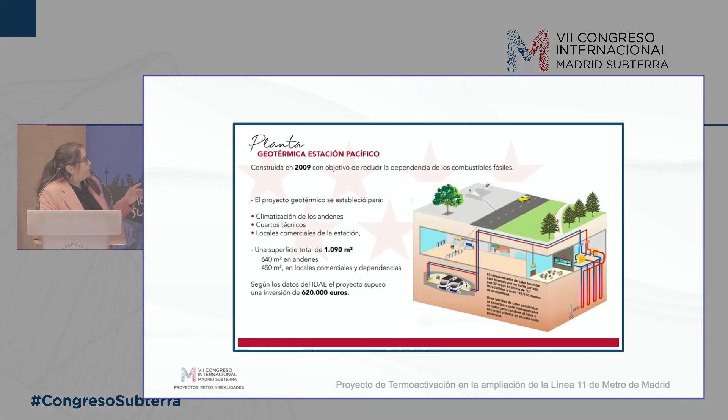Metro Madrid in 2009 launched a project aimed at the thermal activation, building collection wells in the Pacific Metro station, which is in line 1 of the subway of Madrid. This was a project aimed at heating the platforms and some of the businesses in the subway station.

This thermal activation system had the challenge of using capturing wells that on a constant basis received heat from the geothermal system of the station. In other words, we're talking about a low enthalpy installation, where we had those wells that were used to exchange temperature that was then taken to a geothermal pump.

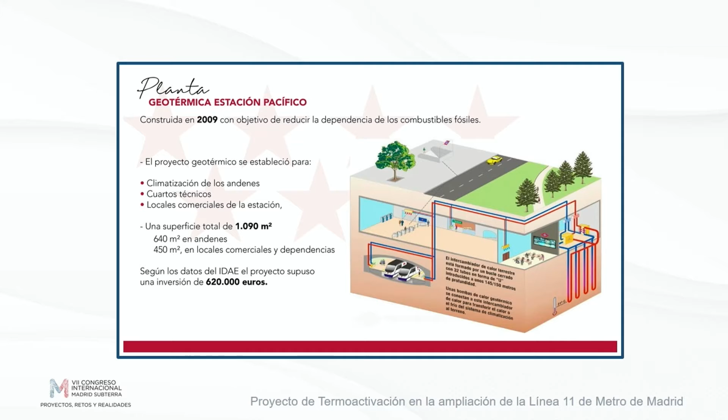The problem with this pump is that the demand of the station was not balanced. The demand of the subway only demanded cooling. So the entire terrain around was just heating up constantly, and as a result, the lifespan of those wells was not as high as we expected. That meant the surrounding area heated up, so there was heat storage that now we're trying to extract, to withdraw to the outside.

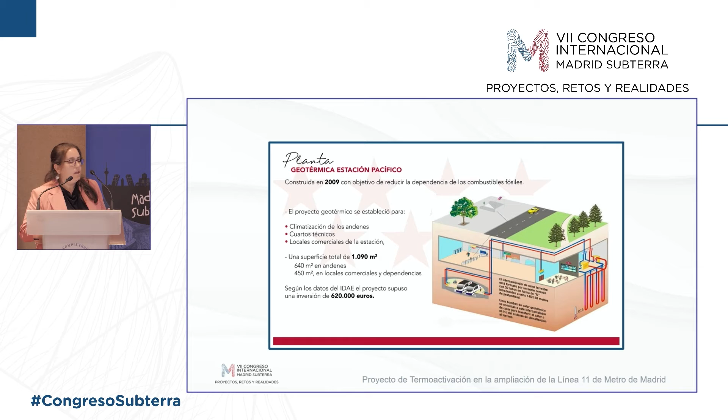In line with the previous presentation, what we're trying to do is to make sure district heating can be evolved so that we can collect all the heating stored in some of these wells in Madrid, in the Metro of Madrid. I'm going to talk about some of the actions we expect to undertake within the responsibility of my agency. These are very important actions and initiatives that speak volumes about the potential of geothermal generation as a source for cooling and heating in the subway.

For example, we have line 5, which will be expanded from Alameda de Osuna until the airport. We have line 11. All these actions within line 11 are related to a bigger infrastructure that is going to be developed in Madrid that will connect the north and the south, and allow us to connect the entire community.

So we're talking Cuatro Vientos, La Fortuna, Plaza Elíptica, Conde de Casal. This is the action I'm going to be focusing on during this presentation, because it's what we expect to implement a geothermal system.

Then the section from Conde de Casal to Mar de Cristal, which is going to be divided into two different sections because it's quite large, quite long. Then we have Mar de Cristal, Valdebebas. All this investment, all these initiatives, are of a public nature, with the exception of Chamartín Fuencarral Norte, which will be funded by a public-private partnership. In the latter, we also expect to include the installation of geothermal systems in addition to other power generation sources, renewable, obviously.

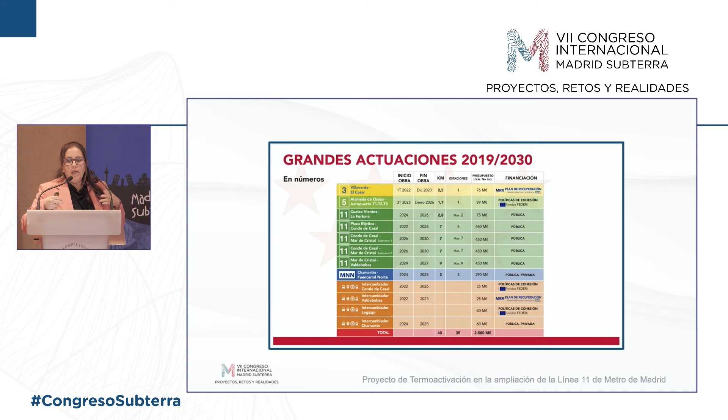In this case, the exchanger of Conde Casal is interconnected with the action of Plaza Elíptica Conde Casal, because in the same station on line 11, in the same place, at the surface, we will have that exchanger, which will be the one that will collect the energy that is generated in each of the areas of the metro.

We're going to thermoactivate the different structures that are collected in the subway stations of Madrid. So we collect the residual heat that is latent in the subway of Madrid, and we will return it as usable energy to the exchanger of Conde Casal.

That's the idea. We'll have additional initiatives, such as the exchanger of Valdebebas and the one in Legazpi, and another one in Chamartín. As you can see, these are very important projects. It's a significant investment within the region of Madrid, and therefore this will be a great opportunity to use renewable energies and to change the way things have been done so far.

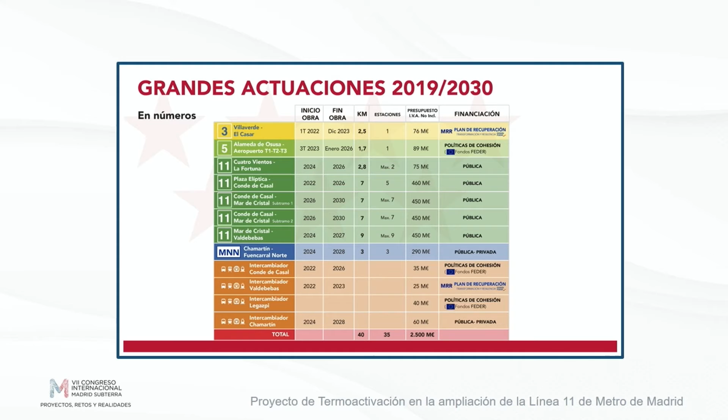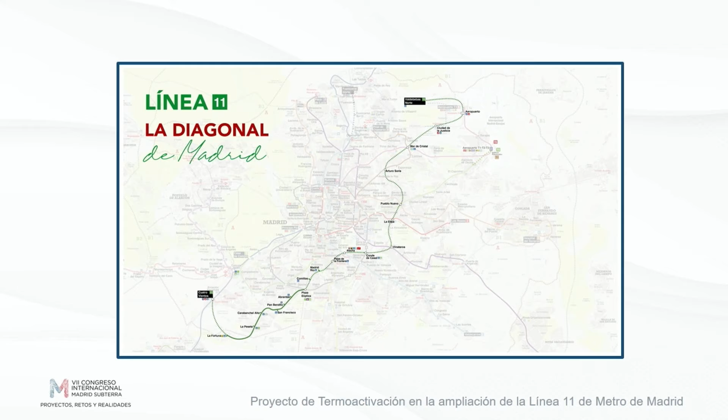This is what I said before, which is the connection between north and south, from Cuatro Vientos to Valdebebas. As I said before, these are the different sections of line 11, kind of like a graphic representation. Here you can see,

as part of the actions for the Diagonal in Madrid, all the hubs that will be created. So a hub in Plaza Elíptica, a transport hub in Cuatro Vientos, in Atocha, Mar de Cristal, Conde de Casal, Valdebebas, the airport, and Chamartín.

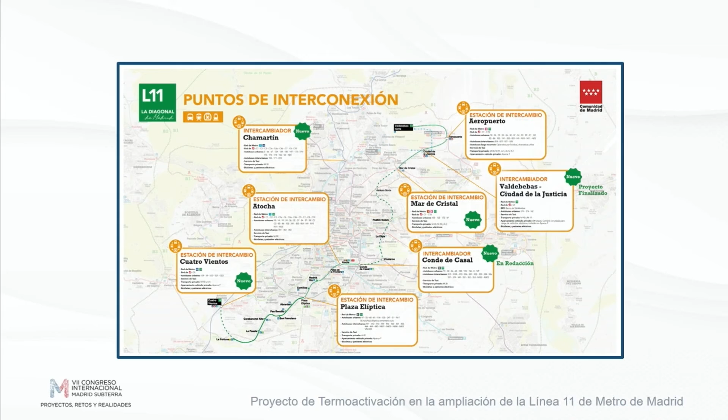It's important for you to see what's going to be executed on the surface and what it connects with, so that you can look at the potential people and companies requiring heat from this metro. So here we can see in yellow what we're going to do from Plaza Elíptica to Conde Casal, the bit that we're going to talk about in this speech.

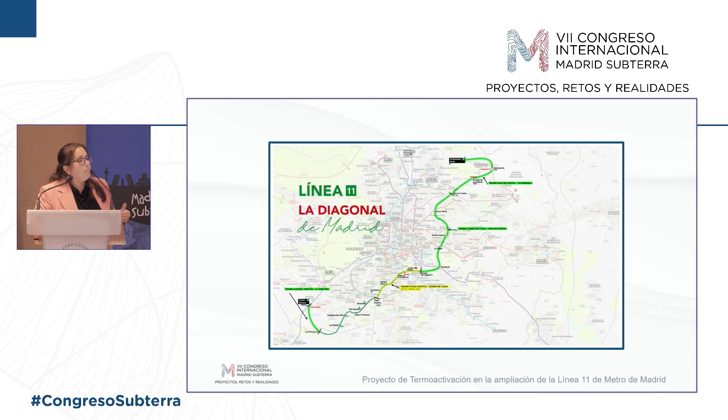And we're going to talk about what we're going to execute immediately. So all the other actions will take longer. This will be the most imminent one. And here you can see it more detailed.

In this slide, we present why we decided to execute this section. This section is being done because of the demand. There's a demand across this area, and it's something that was required.

So we are creating two new stations, Comillas and Madrid Rio, and we are interconnecting this line to other lines in Madrid Underground: Plaza Elíptica with line 6, Palos de la Frontera with line 3, Atocha with line 1, with the commuter trains and long distance trains, and Conde de Casal with line 6.

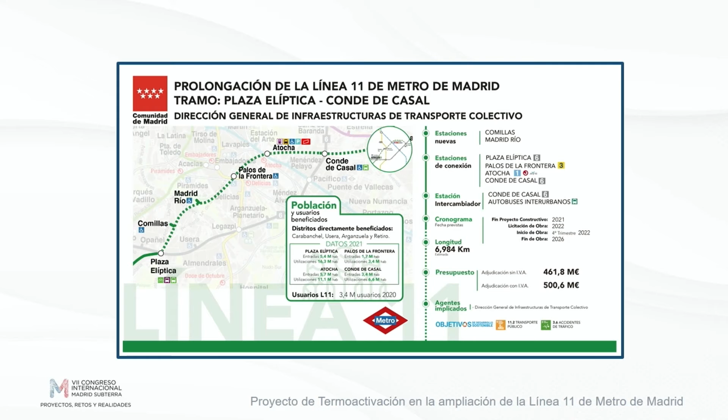Conde de Casal station, we're doing the underground but also the surface work for the transport hub in Conde de Casal. And well, here you can see the amounts that will be invested.

So let's talk about the Conde de Casal underground station. This is the station that we aim to use as a project for Metro de Madrid and for the Infrastructures Directorate. It's going to be a pioneer for the thermal activation of the structures.

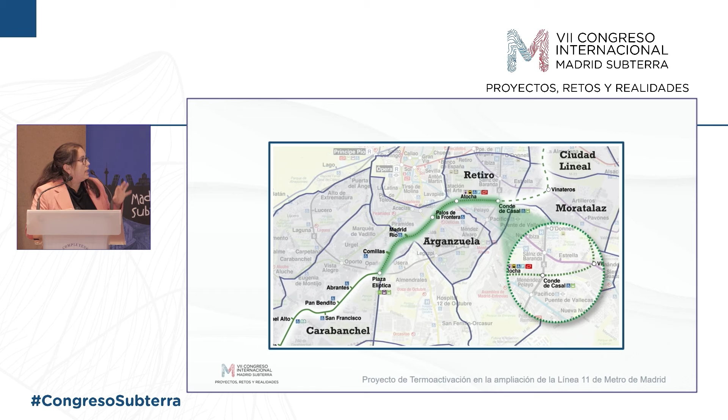We want to carry out in this station, as I said before, briefly, where we want to thermal activate the infrastructures, both at the station, but also in the tunnels, in order to exchange the surplus energy that we have.

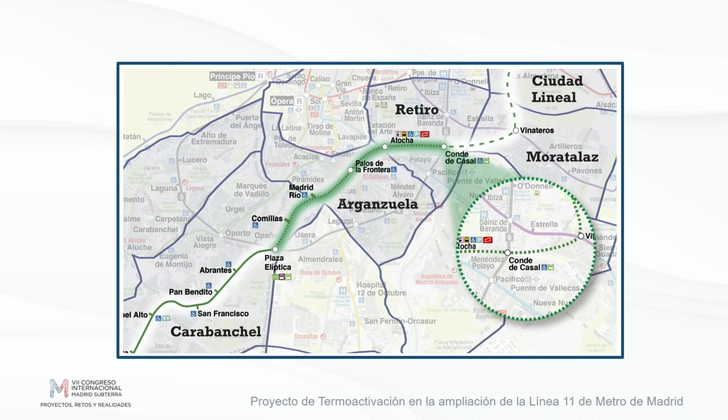Obviously, when the trains brake, they produce heat. All the facilities, in fact, produce heat, which is a problem for us and that we must eliminate. So we are thinking of thermal activating the structures so that we can give heating and cooling to the Conde de Casal transport hub.

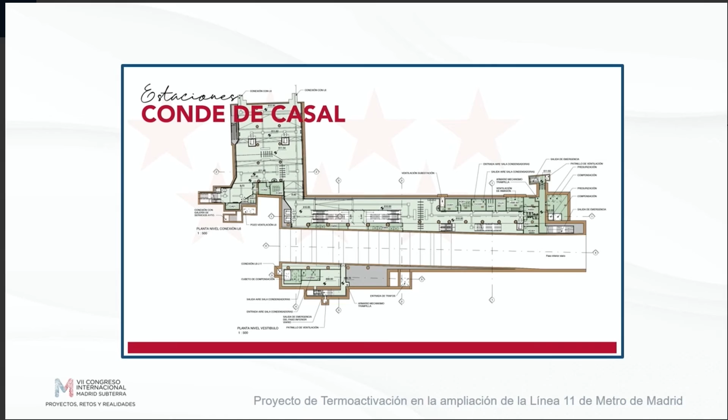Just so that you can get an idea, normally the stations, you can see how it is in the plan. Conde de Casal train station, we have the project already designed. And what we aim to thermal activate are the screens and the pillars within the station.

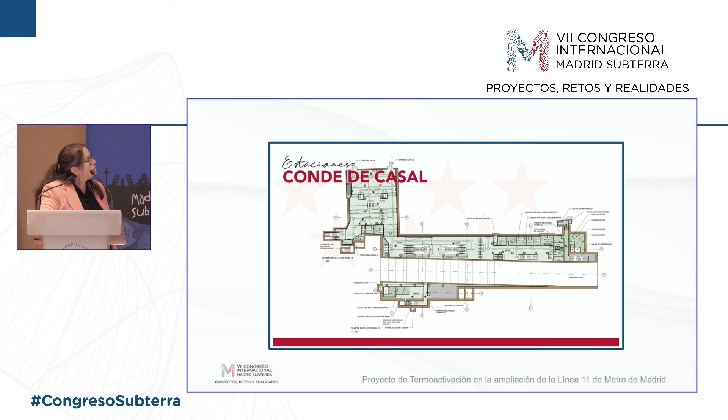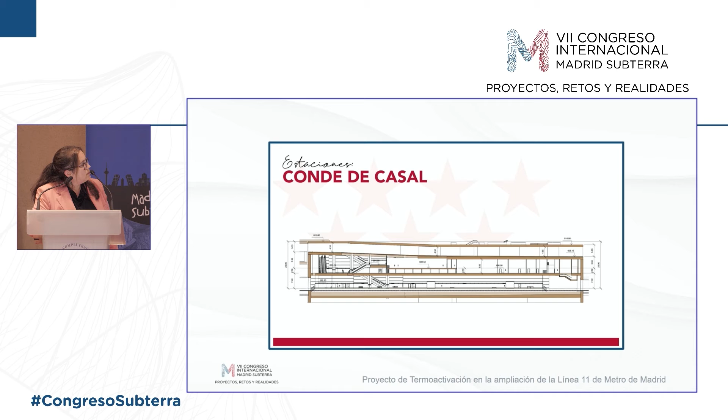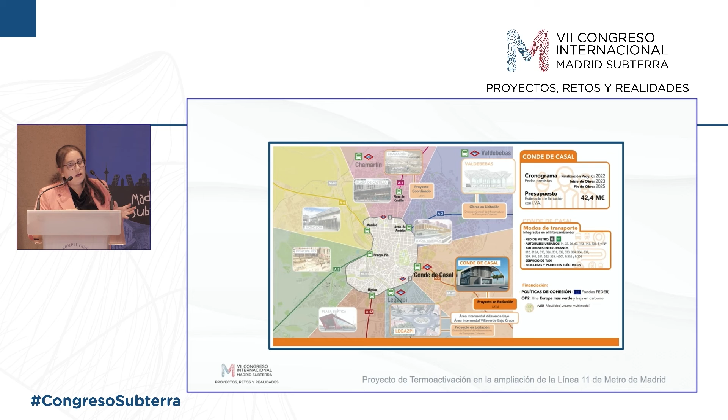So this is the station, as you can see it in a cross-sectional map. The thermal activation will be done on the screens and on the pillars, on the shafts. So just like we did with the section on line 11, we're going to do the same with the Conde de Casal transport hub. Here you can see the investments that we're going to make.

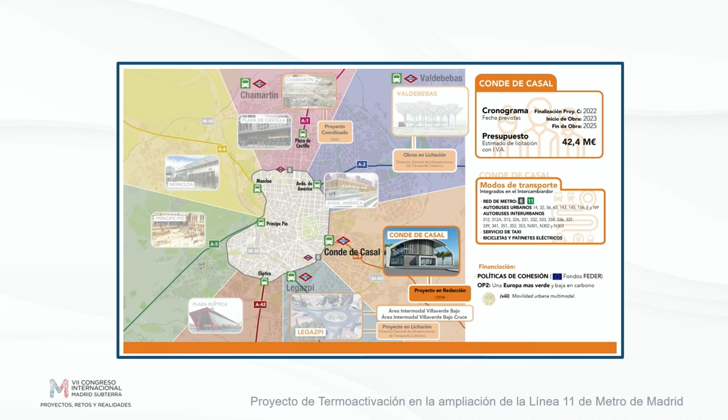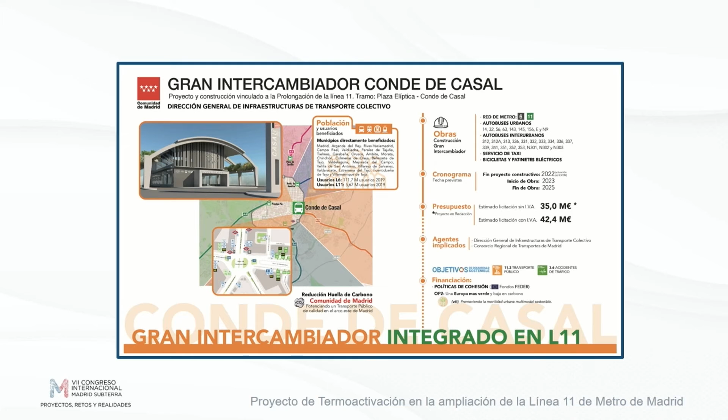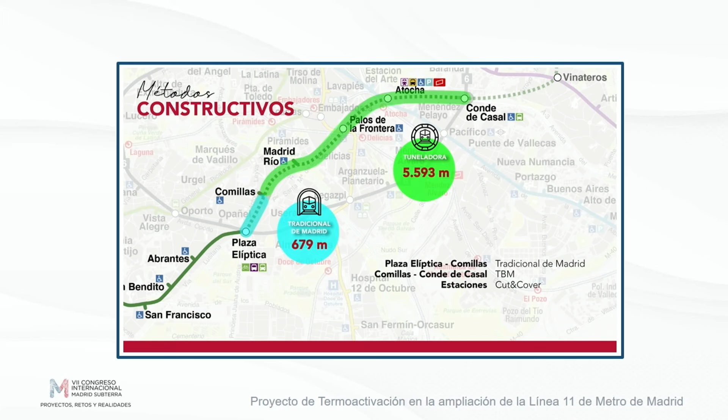It's also important to talk about how we built it. The line 11 section that's going to be executed will have two different construction methods: the traditional Madrid method for 679 meters, and with tunneling machines 5,593 meters. This gives you an idea of the size and dimensions of this project.

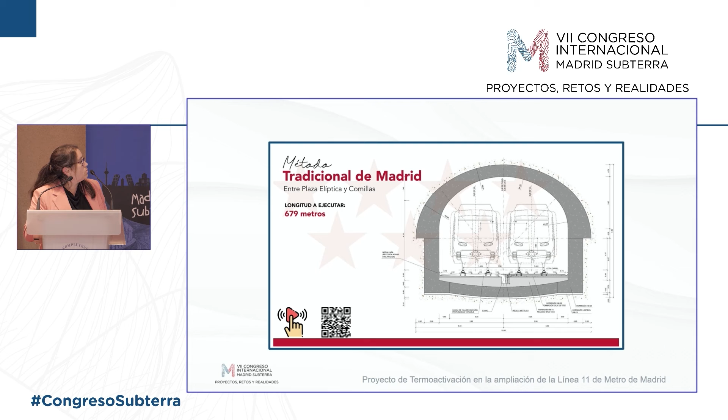Here I describe the traditional method for Madrid so that you can see how we execute it. You can use this QR code if you would like to watch a video, and that will send you to a YouTube video where you can see how we execute those 679 meters with the Madrid method. It's also important to say that this method that we are executing...

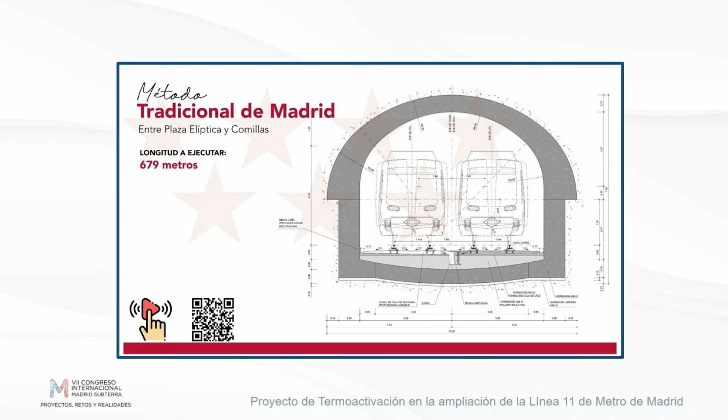it's important so that you can see the way in which we are going to put the pipes for the geothermal capturing. They'll be included on site, on the keystones, on the piping, but on the TBM, the tunneling method, which is a total of 5,593 meters, they will be prefabricated with their pipes. In subsequent slides, you will see how the tubes, the pipes, are inside the structure.

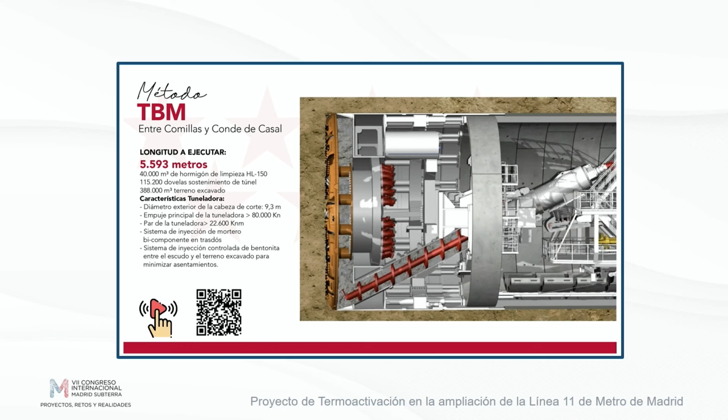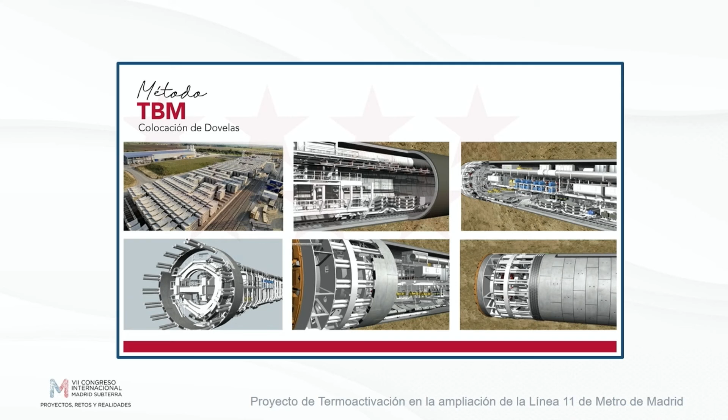You'll see that in just a minute. So this is the section for the tunnel, typical for the tunnels in Madrid. And this is so that you can see the segment factory needed in order to execute it properly.

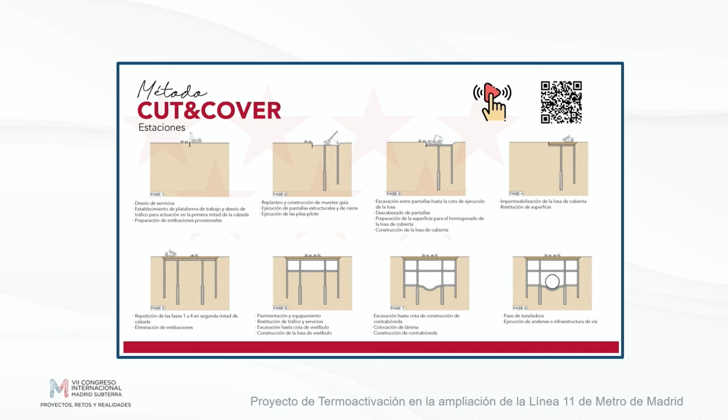As for the station, the construction will be different. It's cut and cover. What we actually normally do is the cover, the top screen of the station. Once we've done the top cover, then we start to carry out the inside of the station. So we'll thermo-activate the screens that are already in the station.

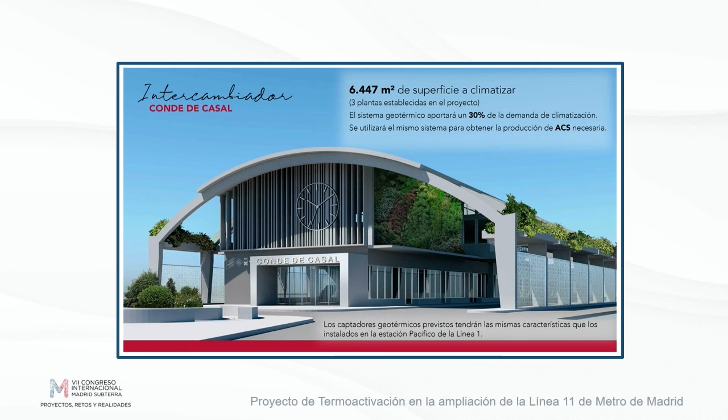The thermo-activation project, as I mentioned, is going to give cooling and heating to the transport hub. This geothermal system initially aimed to provide 30% of the heating and cooling services through the geothermal substations, and also it will provide hot water with the system.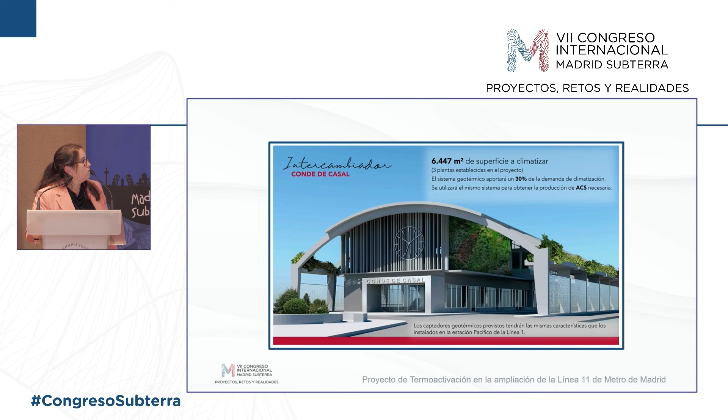The idea to execute this project is, as I said before, the thermal activation of the structures, but also we'll have capturing wells. We need these capture wells because we need to eliminate the heat that comes from the underground system, but we also need to somehow store in the summer all that surplus heat. So in the winter we'll use it, and in the summer we'll store it because there will not be a heating demand.

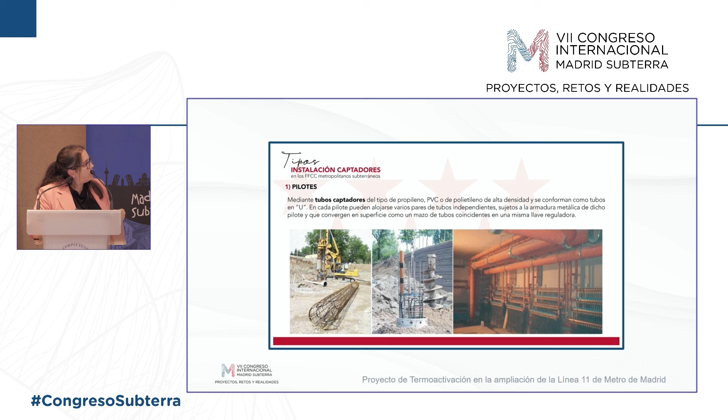And that's what I was mentioning before, just so you can see how we do the introduction of the pipes, how we will implement the pipes that will capture the geothermal energy and how we put it into the structure. So here we have a pile where we put a pillar where we put the pipe in, and once we bury it, we'll fill it up then with concrete. And this is where all the pipes will be.

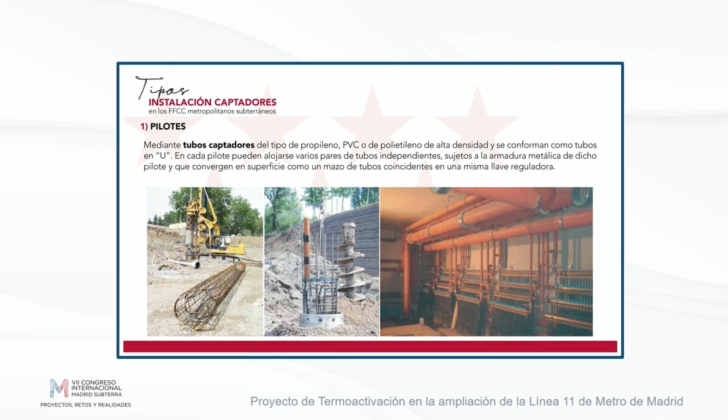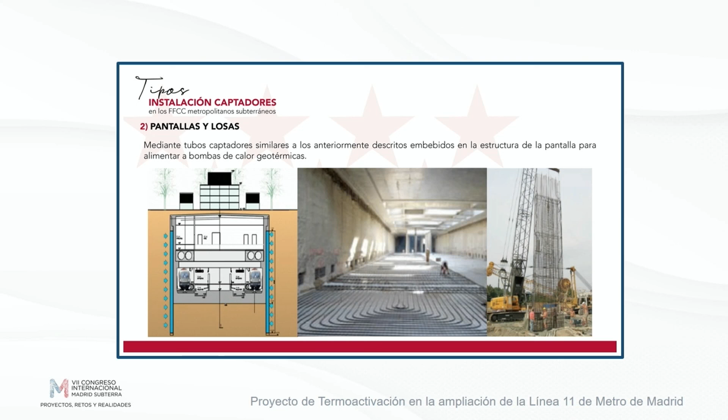This is the piping ring, we could say, where we can see the different pipes that come from the different thermal activated structures. On the screen, well, here we have the different screens. It's very similar to underfloor heating. We thermal activate the whole area, then we cover it with concrete, and that's the way to recover that energy.

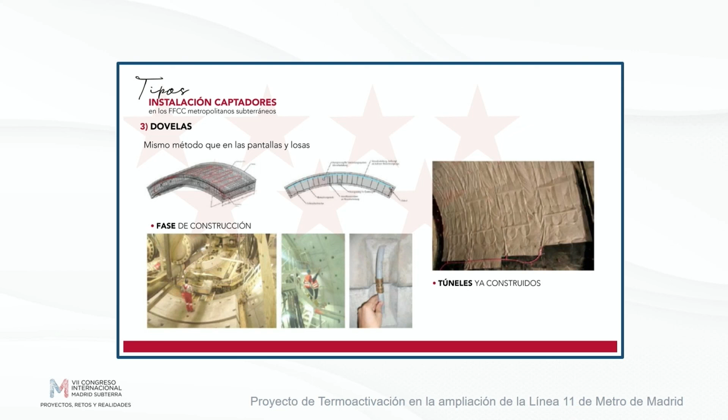And on the keystones, on the voussoirs, we can do it in different ways. The way in which we execute it is a new way of doing it. It's not on existing infrastructure, so we're going to use this system where the pipe is embedded in the keystones. If they were already built tunnels, we could have a heating blanket that could capture the energy.

And that is all. I would just like to say that as the General Directorate of Infrastructures, according to the law, we have to carry out infrastructures, build infrastructures, removing the residual heat, and we cannot remove it as we used to do before. In the past, the heat was just sent to the compensation wells and the air just went out to the atmosphere, onto the streets. Now the law forces us to find alternative ways to evacuate that heat and use it, obviously.

So the Directorate of Infrastructures has implemented this project. This project will be monitored so that we can have data regarding how much heat can be obtained from the underground infrastructure, because currently we only have theoretical data, we do not have real data. So what we're going to do is to monitor all these installations so that we can actually see how much we can gain from Metro de Madrid. And I think this will be a turning point. Thank you very much to all of you.